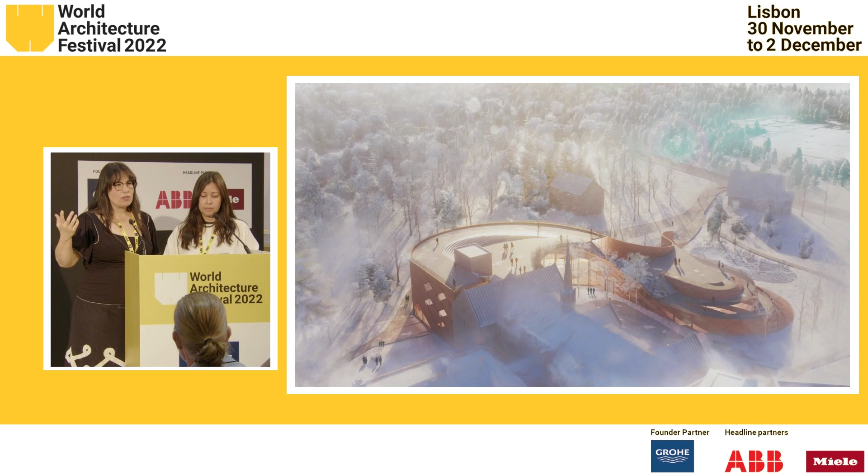You can see the truth of our shared histories. You can see that north direction sharing knowledge, and you can see back to our origins, seeing the water. So that positioning of the bear as a massing pattern for the building is really important.

And the fact that once you enter the building, you're under Mukwa's protection. It's also an important part of creating a place of safety after you have this really intense encounter with this former residential school, which honestly were really death camps for children. They weren't schools at all.

So the next guiding principle we're following is the 7 directions. You may be familiar with the concept of the medicine wheel, which is a diagrammatic interpretation of a philosophical stance representing the interconnectedness of all life systems and our interdependence on one another. If you talk to any Indigenous elder, they'll have new things to say about all the teachings to do with the medicine wheel.

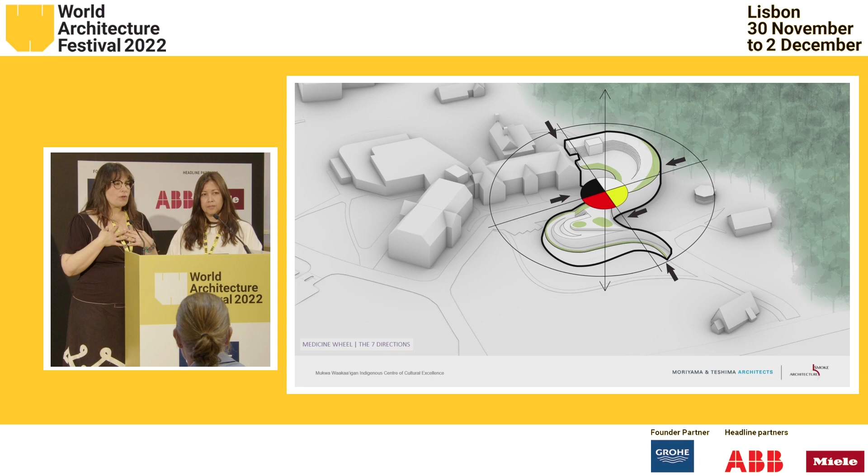But the building is careful to honor those teachings concerning the cardinal directions, the teachings concerning our connection to sky, the direction of up, the direction of down, our connection to Aki, Mother Earth, and the direction of center, the direction of self-balance, and the heartbeat.

This is the east entrance. This represents the beginning of our journey.

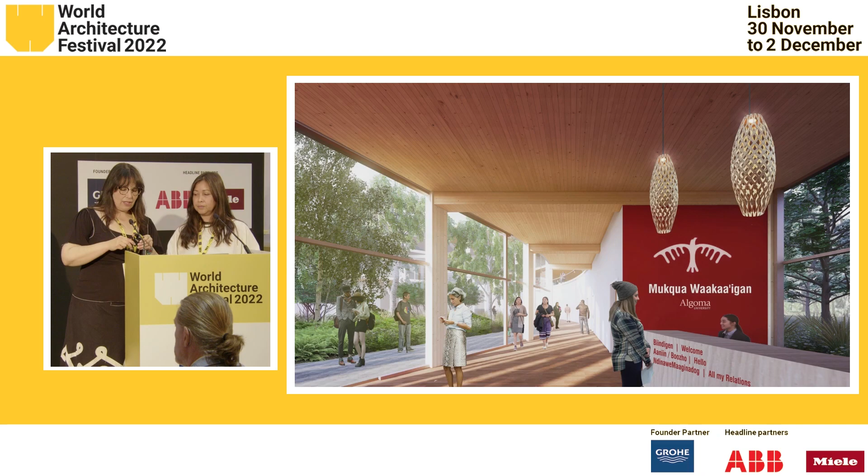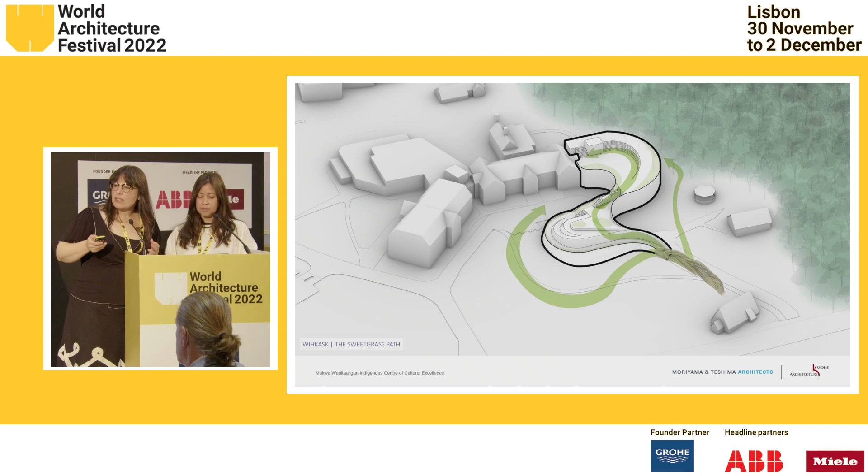As we walk along that journey, we walk up a sweetgrass braid path. The sweetgrass braid is actually from Saskatchewan, a teaching that came to us from one of our student members who comes from Ochapowace Cree Nation. Her teachers told her the sweetgrass braid represents our experience and journey in the present, comprised of our understanding of our ancestors and shared history, a vision for the future of what is possible, and the path of the present, the needs of the present day. So as we walk this building, those three paths are evident in how we move through the spaces.

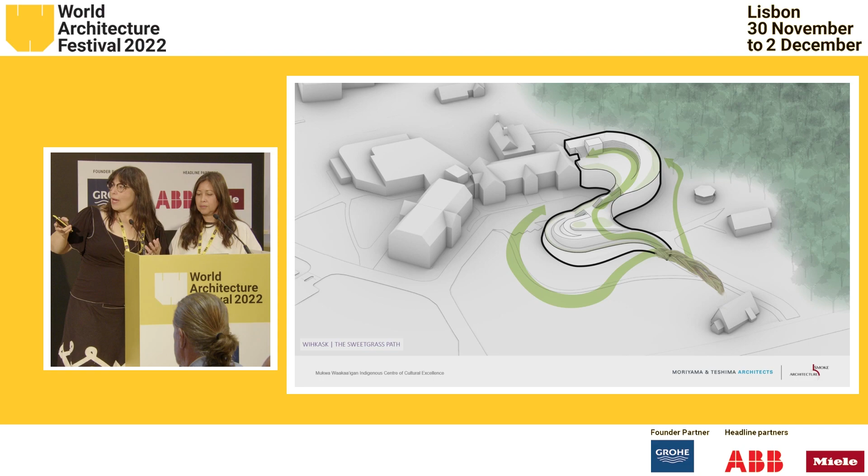Encountering Shingwauk Hall, that former residential school, we look forward to a rejuvenated relationship with the forest through outdoor classrooms that are very permeable on the east side, the direction of new beginnings. Then that path moves forward through the building itself, following the path of Mukwa to the north, the direction of shared knowledge.

Water is where we all came from. It's a feminine element; we were all created from water. Water is another element that we honor in the planning of the building.

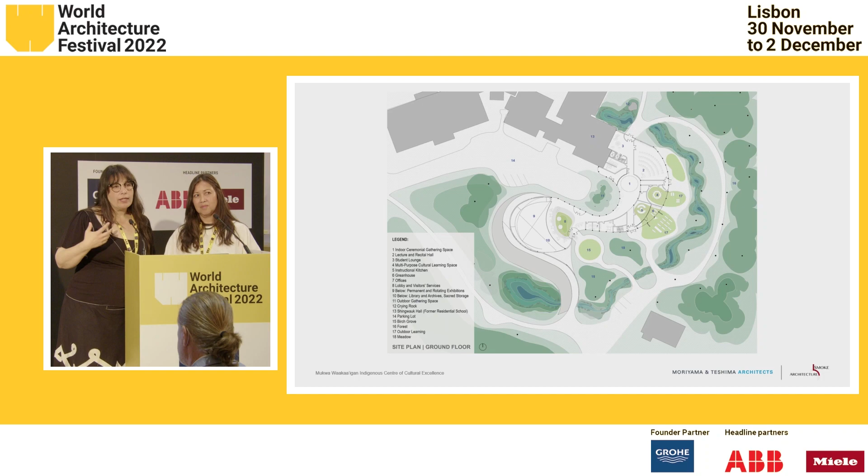Working together with Trophic Design, Terrence Radford, a Métis landscape architect, and Eric Claver, another landscape architect—they're fabulous—we marked the path of water through the site and honored it. It actually generated some of the forms of the building and becomes part of that permeable learning environment, porous between indoors and outdoors.

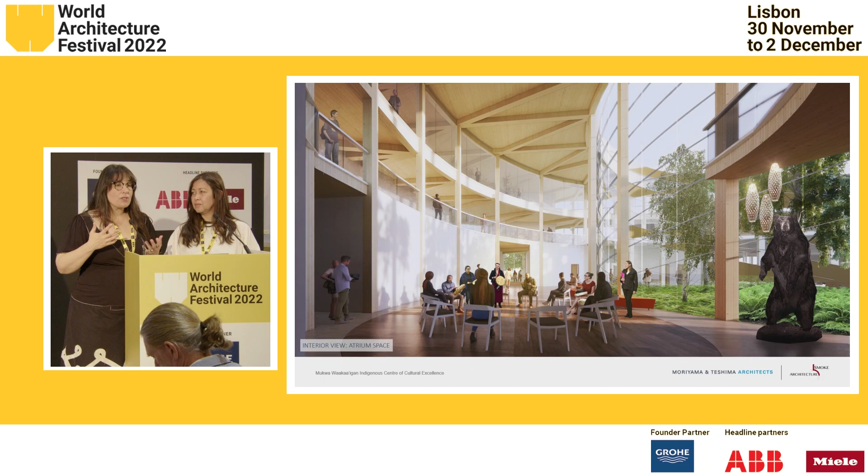The Tikanagan is one of the important patterns we follow here. A lot of mass timber buildings follow a very rectilinear post and beam pattern, but here we use the teachings of the Tikanagan, a cradle board that swaddles young babies and makes them feel safe as though they're still in the womb. So this lacing inspires the structure and the features of the cladding, representing our honor for our children.

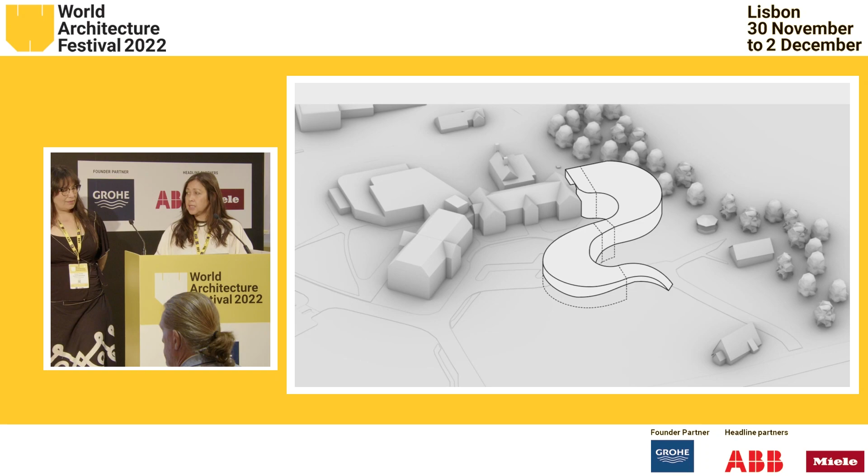The building massing will occupy the right-hand side on the screen here. The building is organized into two arcs: the northern arc is the area of teaching, and the southern arc is the area of cultural programming. The site is sloped, the arcs are connected, and create a pathway throughout the building and over top.

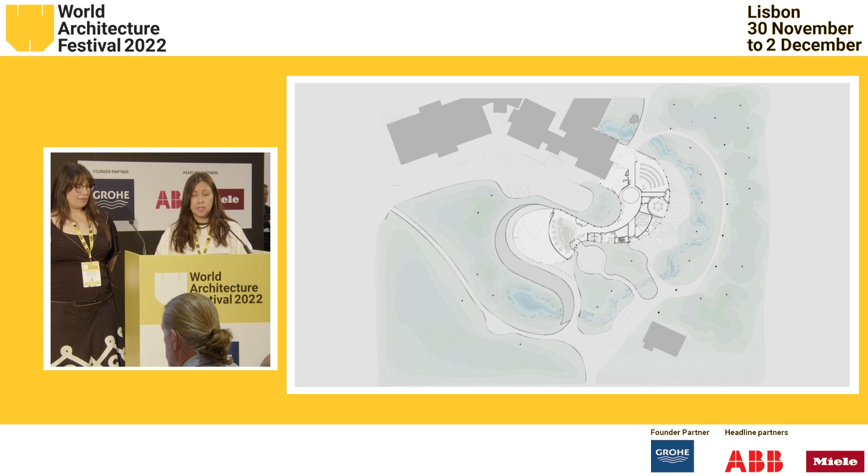An important component of the project is to support land-based learning. So a series of outdoor classrooms bordered by a stormwater management stream are reciprocally reflected indoors with teaching spaces, to blur the edge between contemporary learning and traditional land-based learning.

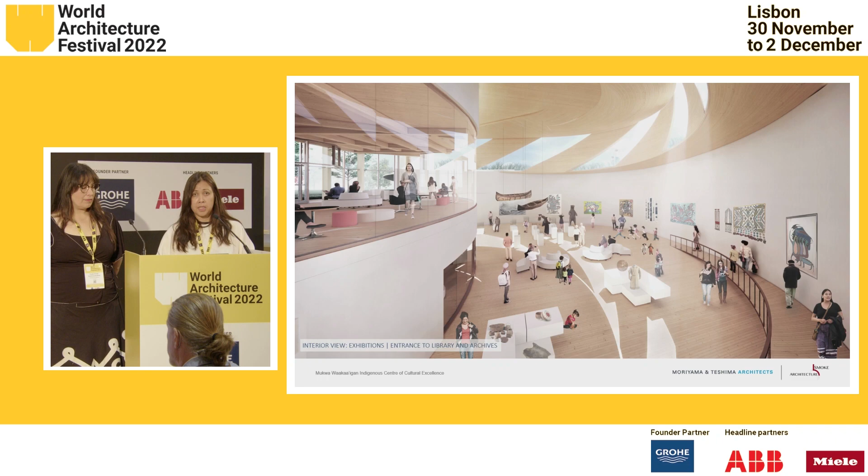The project also has a major cultural component. This building will be the house of not only archives, but the stories and familial records for those seeking to learn about their families and family histories. It will focus on the survivors of the residential school system.

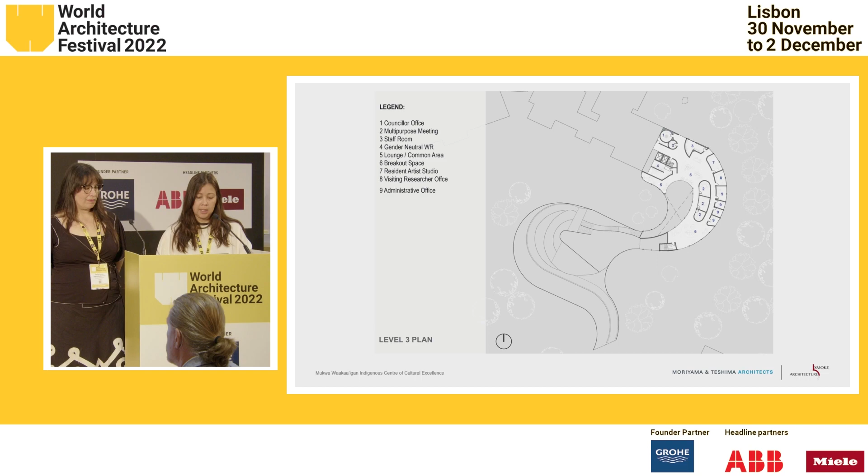The upper levels have more informal spaces for the community, and the third floor has spaces for counseling and wellness, as there is intergenerational trauma that exists today and will continue to exist for generations.

This notion of healing not only extends within the building, but Waakaa'igan will also aspire to heal the land. Currently, all the green spaces on this university are covered in lawn, but really this is a wetland environment. So by bringing back the species that were there before European contact, we will bring back the forest undergrowth, the dry and wet meadows, the riparian landscape, and also aspire to tell stories through the planting.

Orange in Canada has become the color of the motto that every child matters. So planted with Indigenous wildflowers in the color orange, these will populate the land, along with edible plants to remind us of the gifts and our relationship to nature.

This project will not only be a habitat for the human spirit, to grow and nurture the Indigenous community, but also be a habitat for all our relations—the plant life, the swimmers, the flyers—and to be a place of healing for the land and all the creatures in this environment.